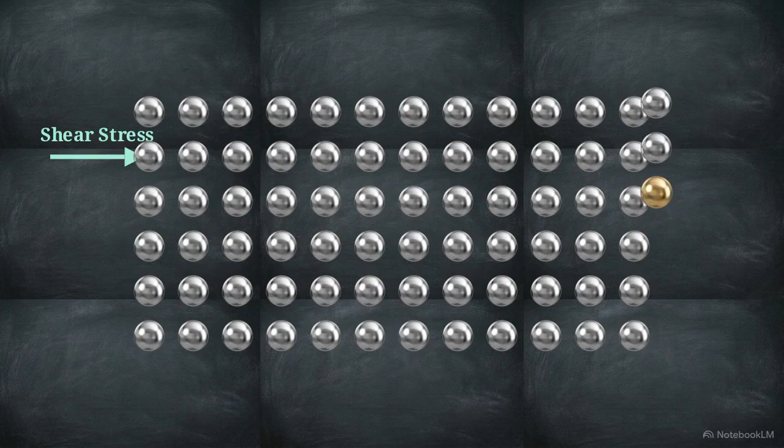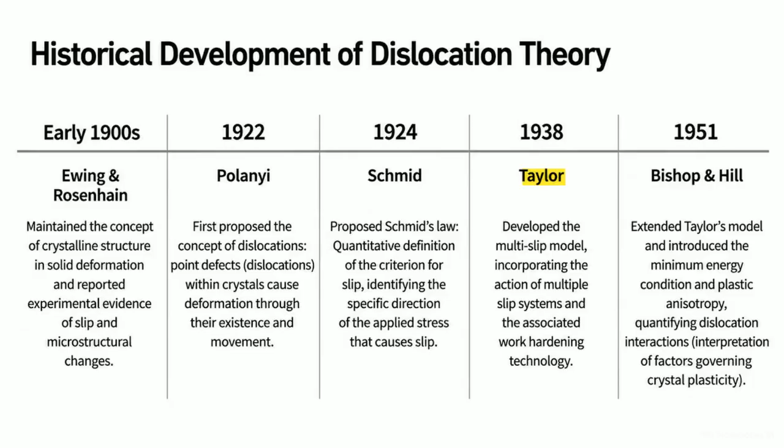The math only aligned with experimental reality if the crystal contained existing line defects, dislocations, which allow the lattice to shift one row of atoms at a time. This theory evolved across the early 20th century, progressing from Schmid's 1924 definition of specific slip directions to Taylor's 1938 model of complex multi-slip interactions. The observable flow of a metal under load reflects the cumulative migration of millions of these microscopic flaws through the crystal lattice. To map how these flaws migrate, we must establish the 4 physical axioms that govern crystal slip.

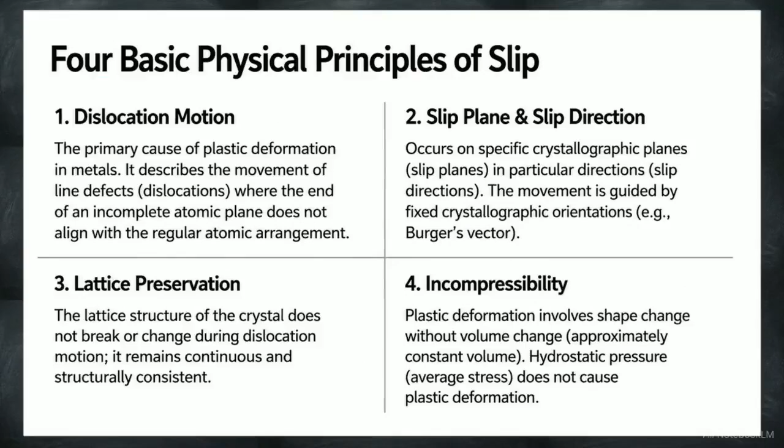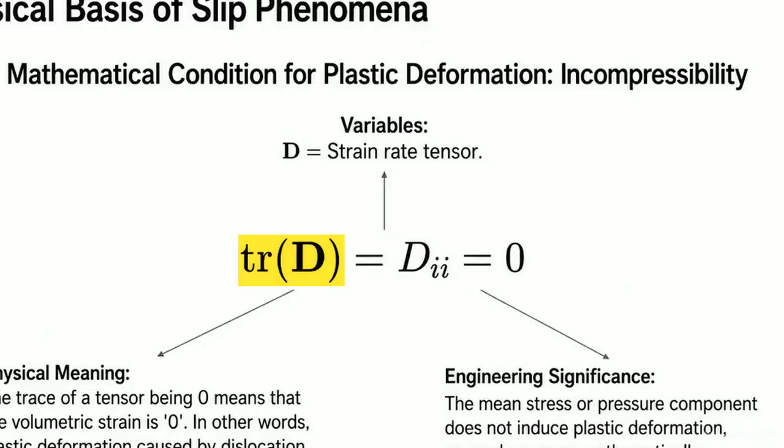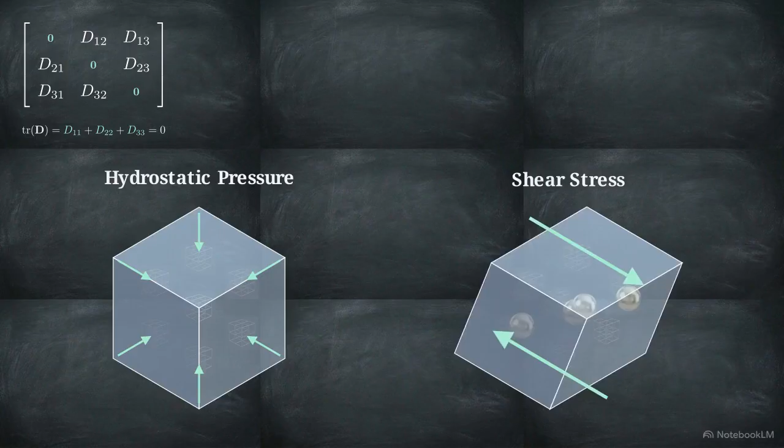Deformation requires dislocation motion, follows specific atomic paths, and occurs without breaking the underlying structural consistency of the lattice. However, the most mathematically restrictive of these rules is the 4th principle, incompressibility. We define incompressibility by setting the trace of the strain rate tensor strictly to 0. This indicates that the sum of the diagonal elements is 0, meaning the material volume remains strictly constant during plastic flow. Because volume is conserved, purely hydrostatic pressure cannot induce a shape change. Only shear, directional stress can drive the motion of dislocations.

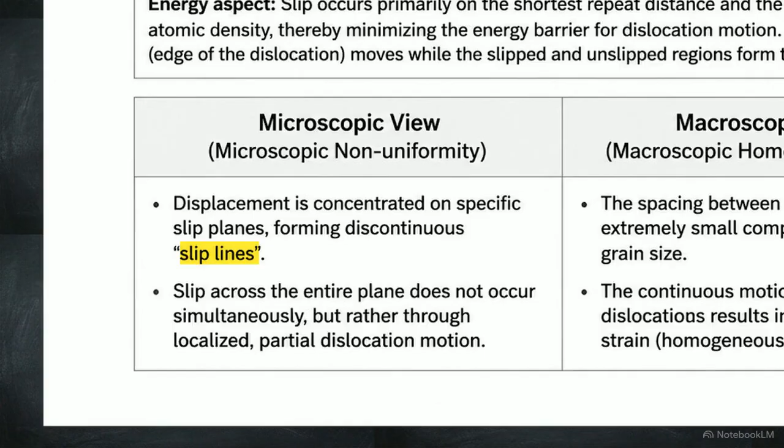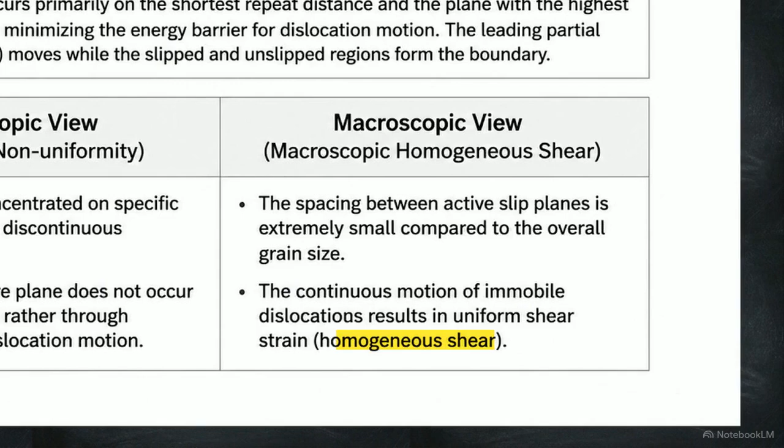A single metal grain at the microscopic level behaves very differently than the smooth, continuous curves we observe on a macroscopic scale. Microscopically, displacement is concentrated on very specific, discontinuous planes, where dislocations move in localized segments. These planes are spaced so closely together that the millions of individual movements firing in sequence appear to the eye as a uniform, homogeneous shear. To predict that final shape change, we must first map the precise microgeometry of the crystal lattice.

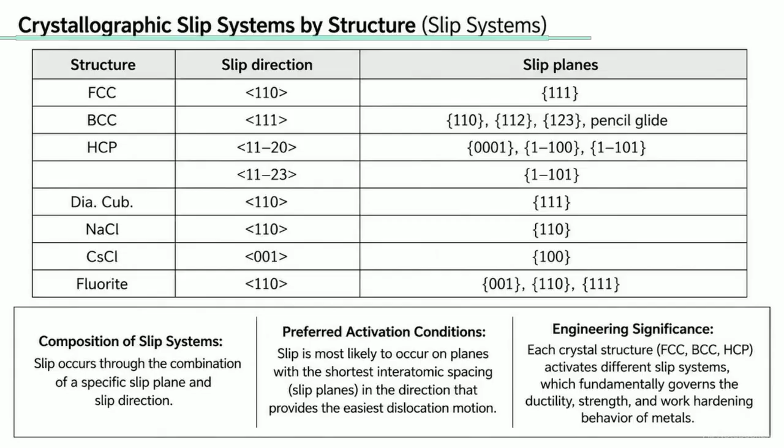Slip follows the path of least physical resistance, the shortest atomic repeat distances on the most densely packed planes. This table details the available slip systems for different structures. For face-centered cubic metals, slip is restricted to the 111 planes and 110 directions.

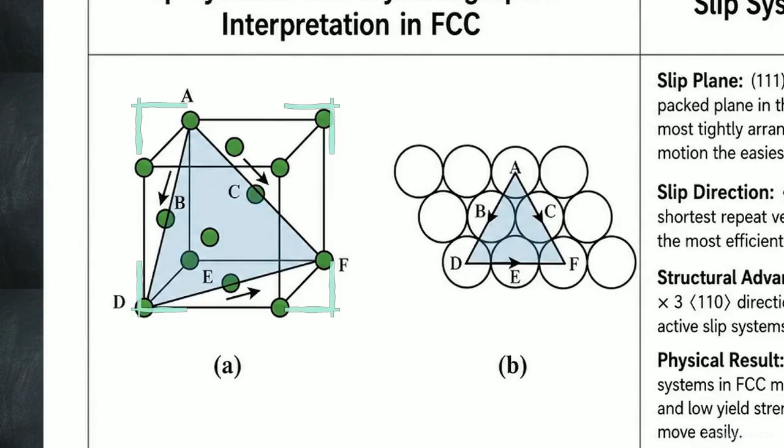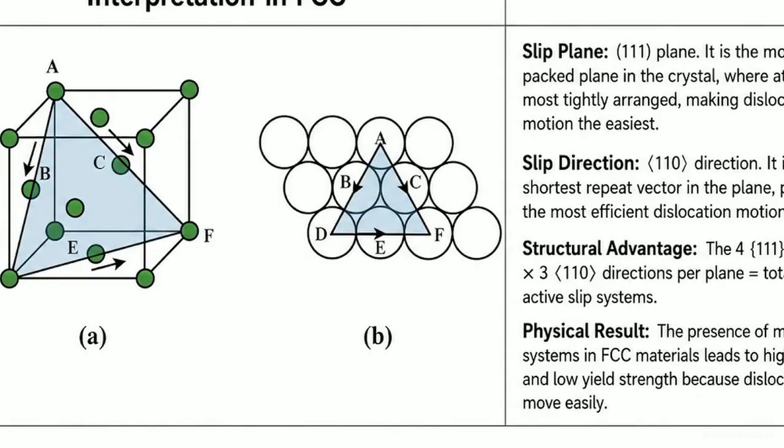Within the FCC unit cell, we can visualize this specific close-packed 111 plane cutting diagonally through the cube. Along this plane, the 110 vectors provide the shortest distance between atoms, making them the most efficient routes for dislocation motion. With 4 such planes and 3 available directions on each, an FCC crystal possesses 12 active slip systems. This high number of available highways for defects to travel is the reason FCC metals like copper and aluminum exhibit such high levels of ductility.

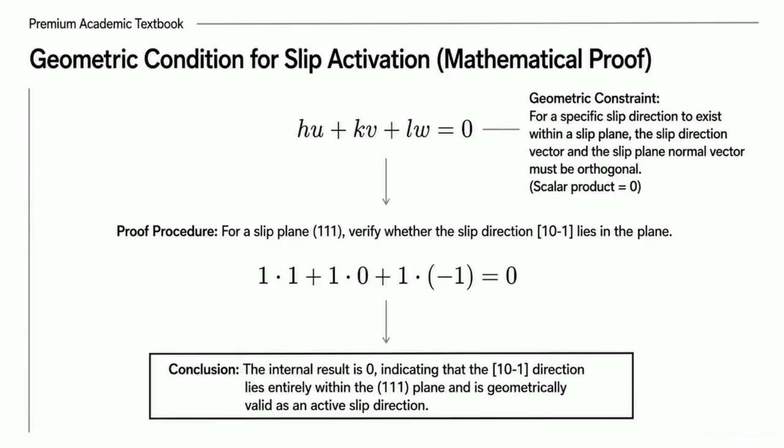For a slip system to function, the direction of motion must lie perfectly within the designated plane. This geometric constraint requires that the slip plane normal and the slip direction vector are completely orthogonal, resulting in a scalar product of 0. By multiplying the vectors for the 111 plane and the 10-1 direction, the result is 0, proving the direction is geometrically valid. This calculation confirms that dislocation motion is not random, it is strictly bound by algebraic geometry.

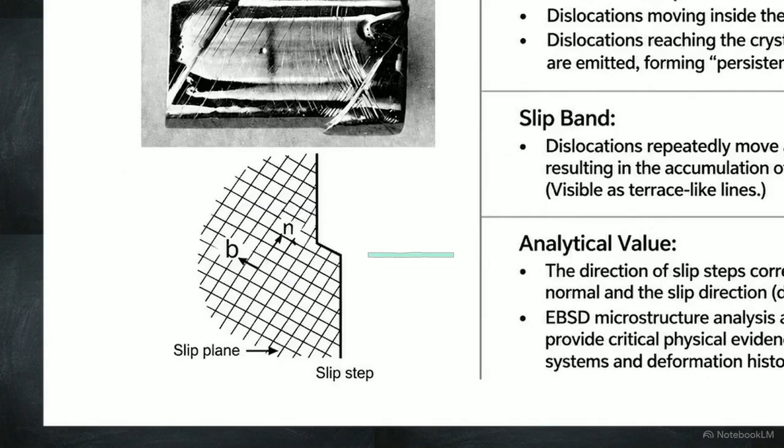We can observe the results of this geometry directly on the surface of deforming metals. When dislocations travel along these geometric planes and reach the boundary of the solid, they create microscopic offsets on the surface. Repeated motion along the same plane accumulates into visible terrace-like lines known as slip bands. Material scientists use the orientation and spacing of these surface scars to determine the exact deformation history of a specimen.

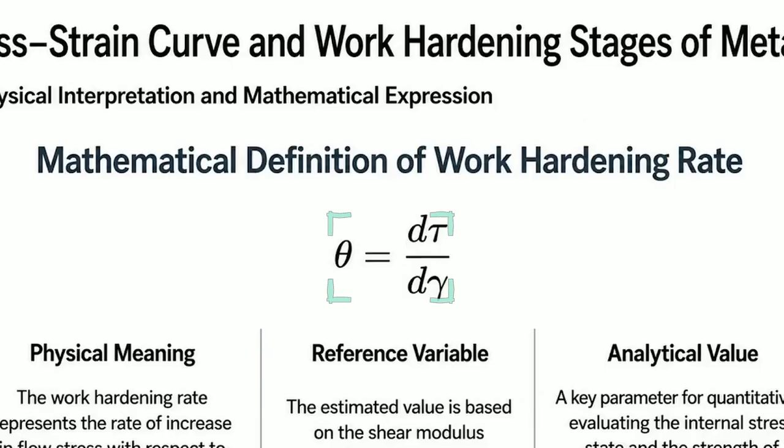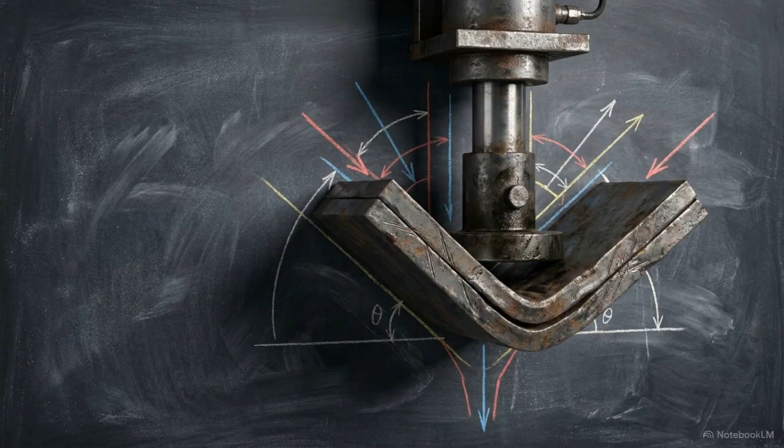As millions of these dislocations move through the grain, they begin to interact and tangle, causing the metal to resist further deformation. We define this increase in resistance mathematically as the work hardening rate, denoted as theta. This formula expresses the increase in flow stress, tau, required to generate additional shear strain, gamma. Engineers experience this effect when a metal becomes harder to bend the more it is deformed, a direct result of dislocations crowding the lattice. The shear stress-strain curve acts as a map, connecting microscopic traffic to macroscopic behavior.

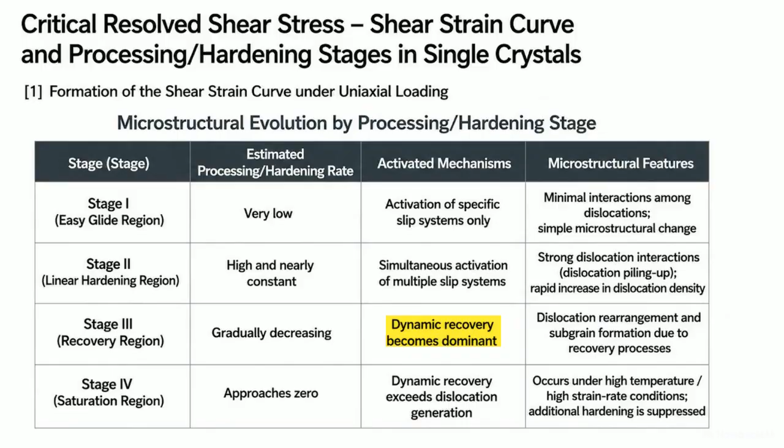In stage 1, the easy glide region, the hardening rate is low because dislocations move on parallel paths with minimal collisions. In stage 2, the hardening rate spikes as multiple slip systems activate, causing dislocations to pile up and block one another. This rapid accumulation creates a massive microscopic traffic jam that significantly increases the applied force required to continue deformation. Eventually, the curve flattens in the recovery regions as high stresses force dislocations to cross-slip or annihilate, relieving some of the internal pressure. The shape of this macro curve reveals the internal life of the crystal, from free movement to total gridlock. Macroscopic strain integrates discrete slip events, governed by the lattice geometry.

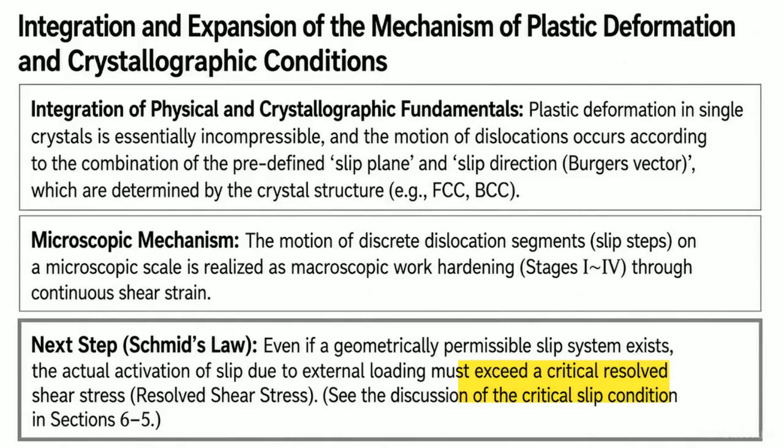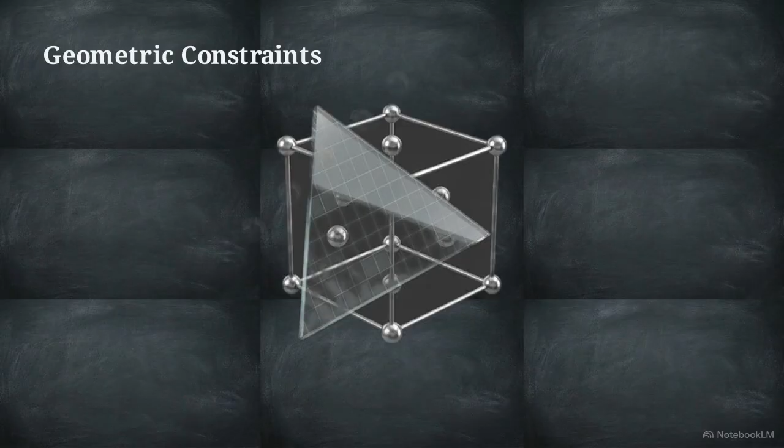While we've mapped where slip occurs, what triggers the movement? External loading must exceed a critical resolved shear stress to overcome the internal geometric friction. The transition from elastic to plastic behavior rests on this intersection. Crystal geometry defines the available pathways, while the precise magnitude of the applied stress decides when the first dislocation begins to move.